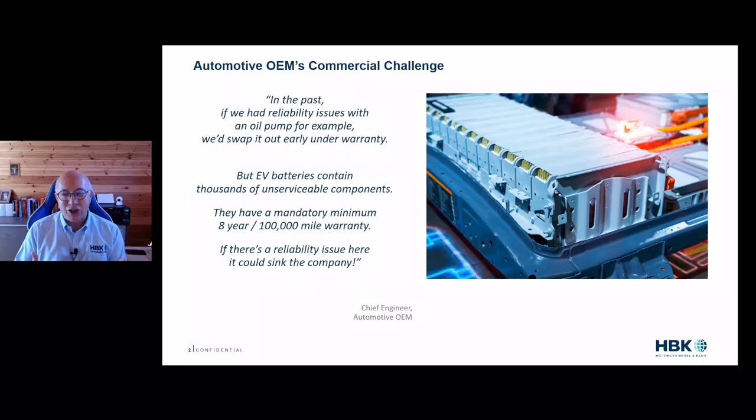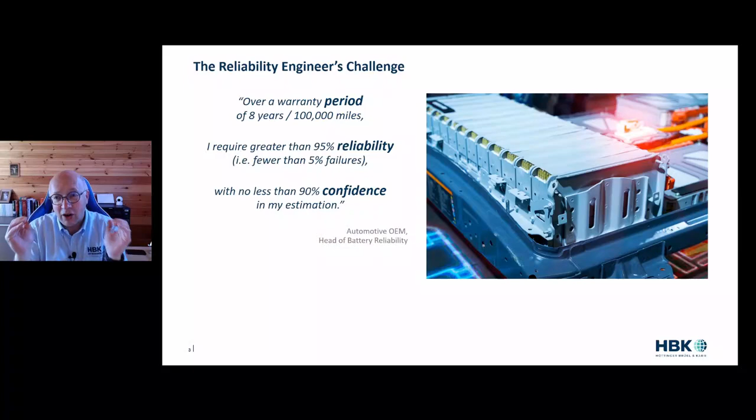Of course, that challenge then filters down to the reliability and durability engineer. The head of reliability put it this way: over a warranty period of 8 years or 100,000 miles, I require greater than 95% reliability. That means fewer than 5% failures, with no less than 90% confidence in my estimation. In other words, we have a period, we have an expected number of failures in that time, and we also have a confidence interval in order for him to sleep at nights.

We know from our experience of statistics that that will require tests in order not just to predict an average life, but to look at the distributions of life. And we know that fatigue is a highly variable subject. Looking at that as a design description, it makes me think about the good old days when all we had to do was pass a sign-off test. Today, the challenge is much greater. And that's what I want to talk about in this presentation.

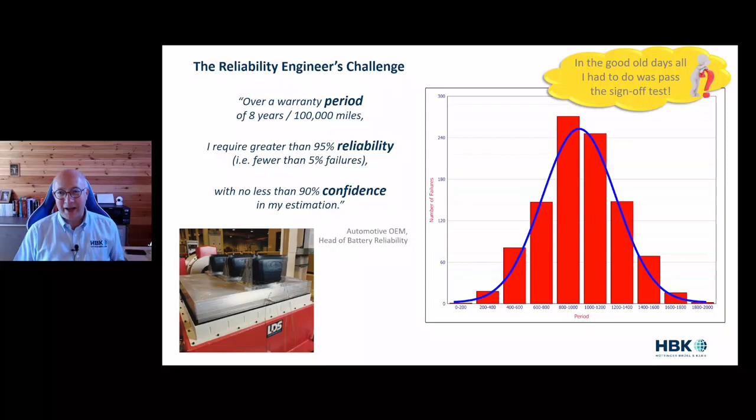So I want to split it into these 4 parts. First of all, I want to introduce simulation, verification and validation. In particular, I want to introduce moving on from deterministic design, which is the way we've designed things historically, to a new process called stochastic design. I also want to reflect on how this impacts fatigue, going from the old fatigue methods of build it, test it, fix it for new innovations, to simulation, verification and validation.

Once we've done that, we'll have a look at how simulation and test can work together. Then we'll have a look at how we quantify uncertainty, because in order for them to move together and for us to validate simulation through test, we have to understand uncertainty. So we'll talk about how do we do that? Where does the uncertainty come from? How do we model it mathematically? And we'll finish with a case study. Then at the end, we're going to end up with the conclusions.

The historic way of doing fatigue design is what we call a deterministic design. Deterministic design is a one-shot analysis. We first of all take all the loads, all the stresses, and we factor them up. That now assumes the very worst cases all act simultaneously. Then we take the strengths and we factor them down to assume that we've got the worst case materials with the worst case production effects and so on. And finally, we add a safety factor to account for uncertainties or modelling errors.

Of course, the variability in the inputs and the outputs, that's unknown. Our risk of failure is unknown, but hopefully if the factor of safety is so big, then we can sleep well at nights. I remember in my very first job, I was designing a bridge in a shopping centre, and the loads were huge. I remember going to my supervisor and saying, where did these loads come from? They're massive. And he says, well, you have to think about the worst case scenario. Let's suppose that a circus comes to town and a herd of elephants are crossing your footbridge. And then suddenly a mouse runs underneath and they all stop dead and they all look over the same side. That's your worst case scenario. And I couldn't help but think, how are the herd of elephants going to get on my footbridge in a shopping centre? But that's the way it goes.

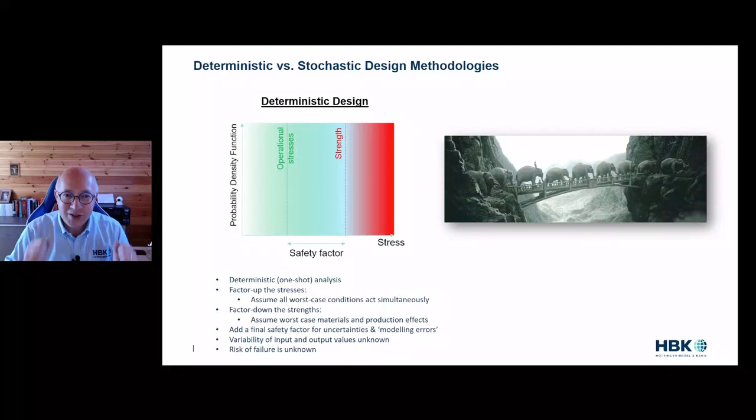Of course, now we want to introduce probabilistic or stochastic design. In stochastic design, stochastic means statistical. So here we're trying to now measure the variability and the uncertainty that we have in our loads, measure the variability and uncertainty in our strengths, and then we're going to simulate those models to find out what is our probability that our most severe user is going to get hold of our worst production model. So by doing this, we can verify the models with the tests, and we can validate the designs with clear and quantifiable risk of failure. That's what we're after.

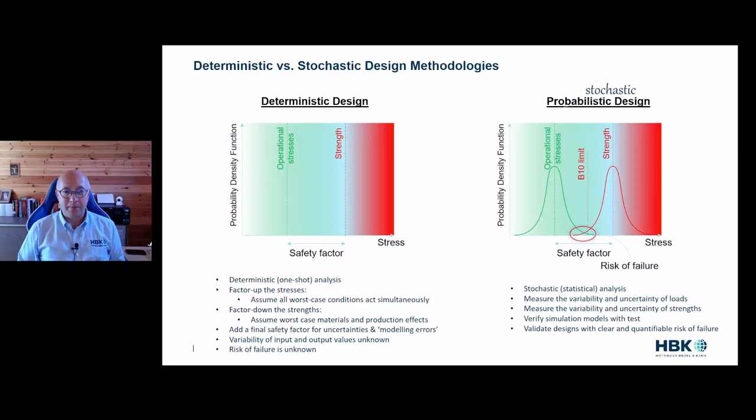So in the beginning, when we go back to fatigue, we used to do it before simulation came in. We'd just use test. We'd first generate a concept, build a prototype, test it, and if it was okay, we'd go into production.

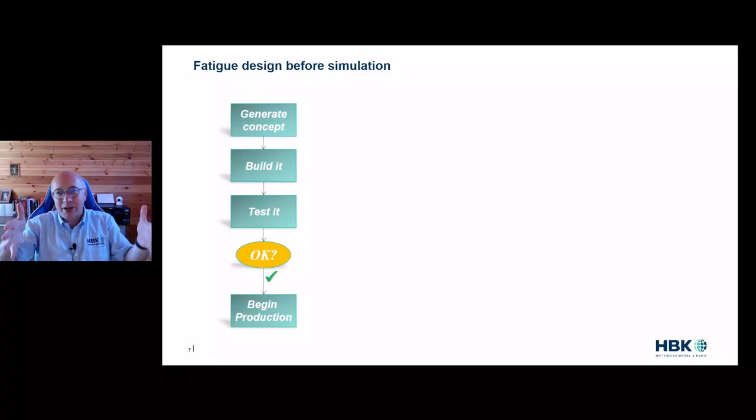Of course, if it wasn't okay, we'd have to fix it. This was a really expensive and time-consuming process of fixing the problem and then building a new prototype to retest. And very often we would run out of time and have to go into production anyway.

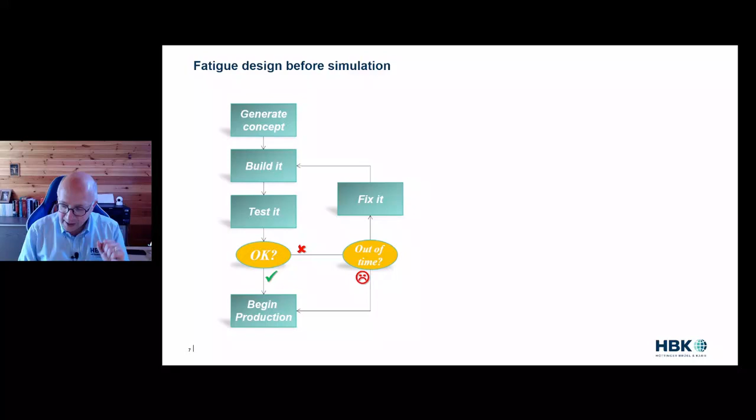Part of the reason is that by fixing one problem, we often create another problem which could be completely different. By addressing durability, for instance, we may hit a cost problem, or we may hit reliability or styling issues. The other problem is, can we test every conceivable failure mode?

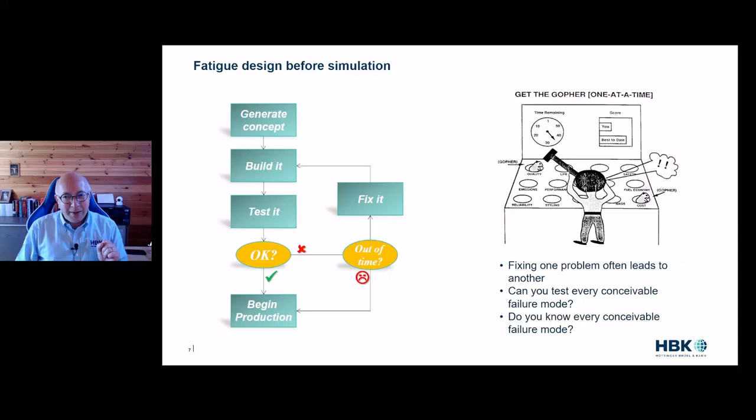That's a lot of tests. And if it's a novel component, do we even know what every conceivable failure mode is? So around two decades ago, or maybe slightly longer, we started to bring simulation into this, and we introduced the 5-box trick when it comes to fatigue.

In order to predict life, we do a fatigue analysis. That fatigue analysis takes 3 inputs: the loads, the geometry, and the materials. The loads are the loads coming in, in kilonewtons. The geometry changes those loads from kilonewtons into stresses in megapascals or strain. And then the material properties change those stresses and strains into fatigue life.

Of course, with our battery, those loads can come from several sources. There may be structural chassis loads, but they could also be inertial loads as the battery mass is being shaken around over rough road surfaces. And of course, there are thermal loads too, due to constrained thermal expansion as the battery heats up and cools down. Now the nice thing is, in simulation, we can model those in CAD and FEA.

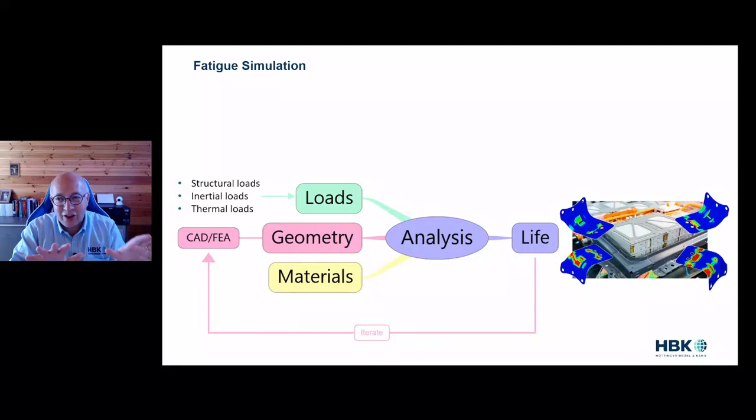We can run through them and iterate that in order to get the design we're after. Now, no one actually ever trusts a simulation, so you're still going to have to sign it off. So the sign-off test comes: we build a prototype, subject it to qualification tests, and then we can measure the life.

Now, to do that, we need to make sure that the test and the simulation share the same loads and the same boundary constraints. I know that sounds really obvious, but up until about a decade ago, it was very normal to do simulation of real loads and then an accelerated test, so it was never possible to correlate the two together.

Which is something that we now do a lot of, correlating them together. So we have to make sure we've got the same loads, the same boundary constraints, and also we need to test to failure, because that's the only way ultimately we're going to be able to correlate the life. I'm going to talk about how we can do that in this session.

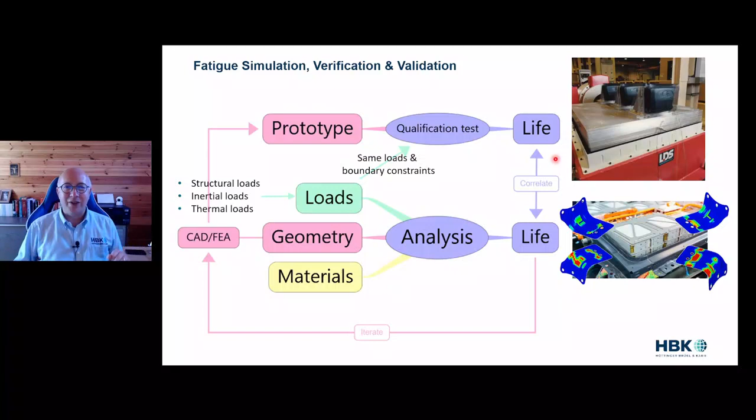So how has this impacted automotive design, and aerospace by implication of the same thing? A friend of mine who is a tech specialist in an automotive OEM put it this way: we have 3 groups of people who are interested in fatigue. We have design engineers who simulate their designs and make them not fail.

We have test engineers who try to make them fail. And then we have our customer, and if we're unlucky, they ultimately manage to succeed in that failure. So the vision is to characterize the customers, to then build a statistically representative test of that customer, and then to simulate the test.

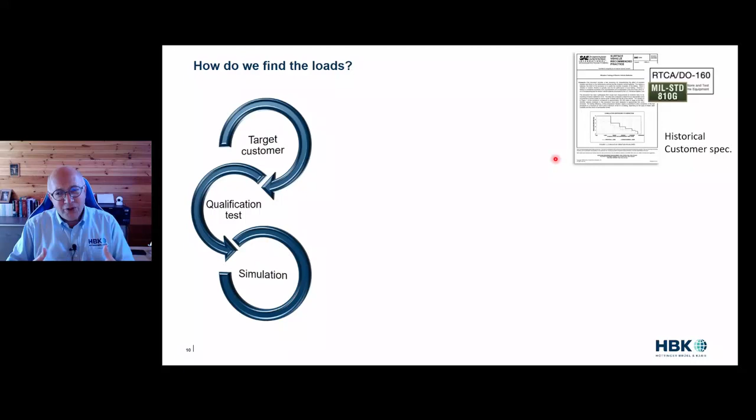So how does this manifest itself in an automotive OEM, for example? Well, historically, we've probably gone to standards or past practice. So if it's a military vehicle, it could be MIL-STD 810, for example, or a military aircraft. Of course, if it's something like a car, you may be using an SAE standard, or your own in-house standard. But with novel items, it becomes necessary to actually go out and measure how people are using them.

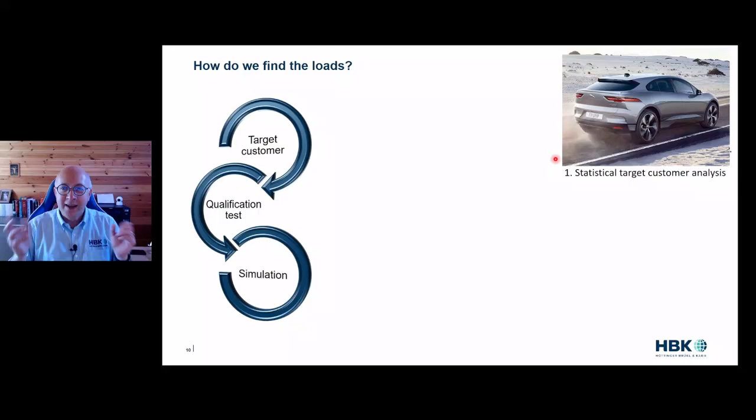And that's what we're doing a lot more of today with electric vehicles: how do people really drive these around the world, as we're designing a world vehicle now? Once we've done that, we can start to build a proving ground schedule. So we characterize the 95th percentile worst driver, for example, and then we'd be able to drive vehicles around a proving ground, and then we can measure loads.

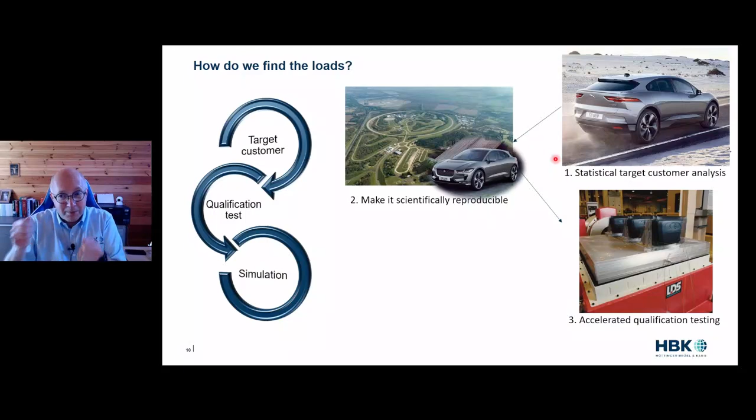We can measure a lot more loads on a proving ground than we ever can on our highway. So in this way, we take our characteristic driver and build a proving ground where we can measure the loads, and then start to build an accelerated qualification test for individual components. We can't sign off the whole vehicle on a proving ground because it has different accelerated damage rates for different types of component. So it's much better to do that in a laboratory.

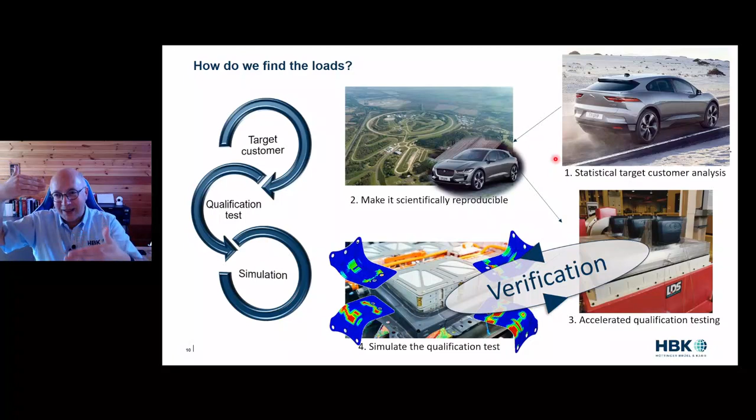And then finally, we come to simulate that qualification test using computer simulation. Now, if we do that right, we can use the test in order to verify the simulation. I'm going to talk about this in a minute. How do we do a test which can then feed into the simulation and vice versa? How do the two play together?

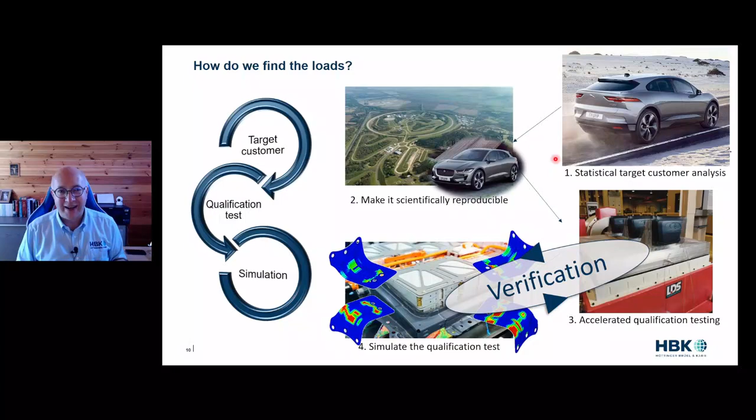Once we've verified that simulation, we can use it to extrapolate different loading conditions and things like that too. And ultimately, what we want to do is validate the reliability target using a properly verified simulation model.

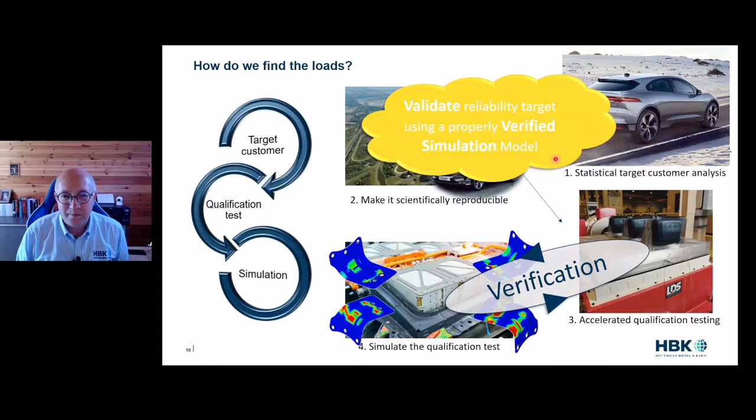So in that last section, we looked at the traditional deterministic design and looked at how stochastic design in the present and the future looks. And we reflected on how that looks in fatigue, from the old build it, test it, fix it days to bringing in simulation, verification and validation.

And now what I want to look at is how those simulation and tests sit together. How do they help each other? So first of all, we have to appreciate that simulation can be valuable before we do the test, during the test, and after the test. So let's have a look at each.

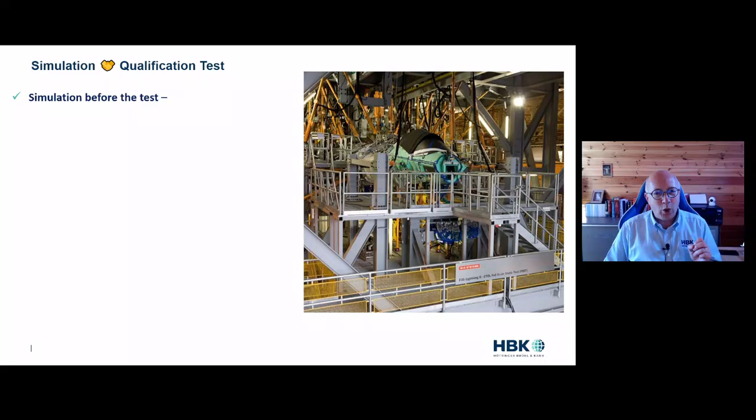So, simulation before the test. What sort of questions do we want to answer with this? Well, the first obvious one is, before I actually invest in an expensive test rig, is it likely to pass? So we're going to ask, what's the expected safety margin? Could I optimize the design further? And most importantly, am I sufficiently confident that I should commit to this expensive prototyping right now? Maybe if I had another month, it would be better and in the end work out cheaper.

Another question we can ask ourselves is, where will it fail? Where should I look for this failure? Is it going to be subtle and I'll need extra instrumentation to spot it, or is it really obvious? And also, do these failure modes correlate with my previous experience and what I expect? Because if they don't, we may encounter a new type of problem, or we may be missing something.

And then finally, is it okay to use a simplified test? If it's a shaker table, it might be a uniaxial test, for example. How does that actually affect the fatigue of my component? Do I get the same fatigue failures? How does it affect the life? Should I add supplemental axes to these? In other words, if it's a shaker table, shake it in Y and Z as well. So how does the test simplification also affect what I'm expecting?

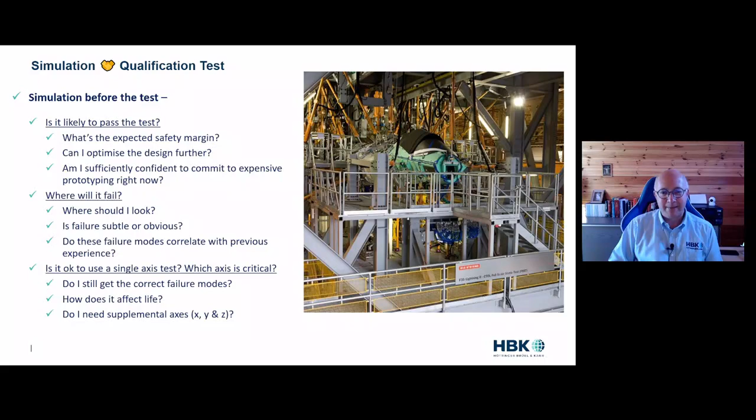Of course, the simulation also plays a part while we're testing as well. So typical things that we might want to look at here is, where's the best place to mount sensors? If I'm trying to find the mode shapes, I want to find the places of maximum displacement. So again, simulation can help us to find that. It can optimize the positioning of strain gauges, accelerometers, displacement transducers and thermocouples, so we get the best measurements from our test.

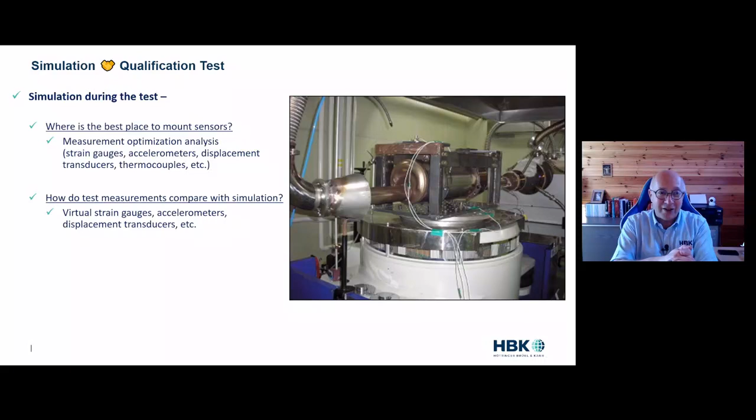Of course, when we collect those measurements, we can also use virtual gauges on our FE models in order to validate them - a virtual strain gauge, accelerometer or displacement transducer. Is our simulation giving us the same response as we're physically measuring?

And finally, we can do parametric analysis too. We can get parameters, such as modal parameters, for instance, which we know are critical in the response and the fatigue of a component. So we can use operational deflection shapes to make sure the natural frequencies and the mode shapes look the same. We can use experimental modal analysis or operational modal analysis to calculate the damping ratios. And we can use modal assurance criterion to make sure that our stiffness and our mass and our damping matrices are right and we're getting the right correlation.

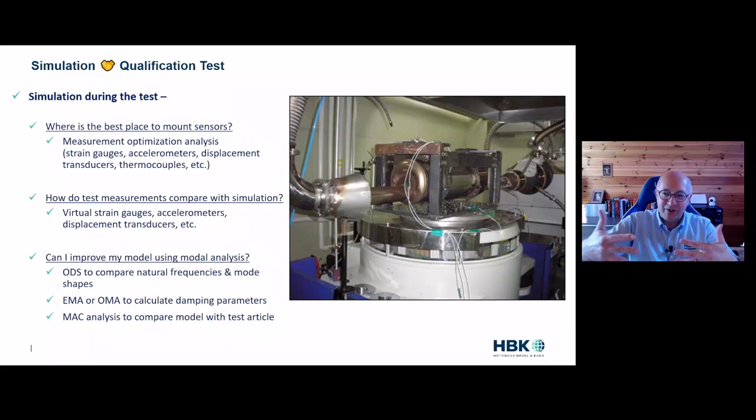So we're using the test not just as a simple sign-off test, but in a way that we can feed back and verify our simulation model. And then finally, after the test's finished, what happens if it failed? Well, in that unlucky occasion, we can actually simulate the failure mode.

We can take our simulation and say, what is it we got wrong? Can we simulate this failure mode to find that out? I can pretty much tell you it's going to come down to a difference in the fixing between the simulation and the test rig, boundary constraints, and damping ratios. They're the three critical ones.

But once we've fixed it, we can then play what-if games to fix that problem so that the next time we test an article, we're guaranteed it's going to pass.

Another thing you can say is, how confident am I? I might only do 1 or 2 tests. How confident am I in that? What's my warranty exposure? Should I test to failure or just stop at a given target? And how many tests do I do?

So you think about this as, say for example, a shaker table sign-off test. It's a bit like kicking a ball over a wall. You kick the ball, and at a certain given time, there's no failure. In other words, the ball's over the wall. And then you usually stop the test, don't you?

You've got no idea what happened afterwards. Did the ball carry on? Would it have failed 10 minutes after or 10 days after? We're not really sure about that.

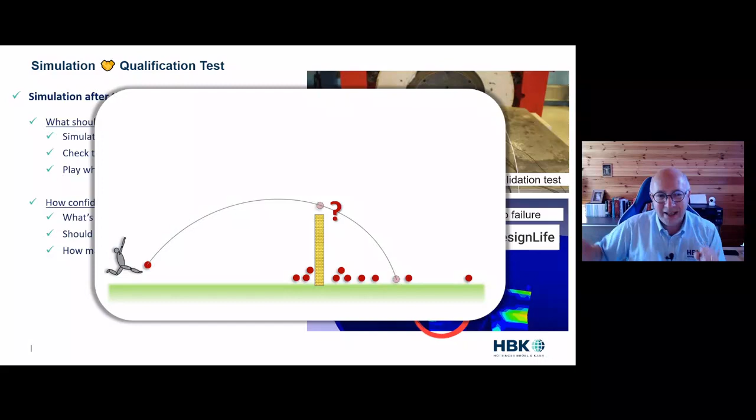And also, what happens if I kick a number of balls at the wall? How many clear the wall and how many don't? Because those that don't clear the wall, they're going to be our warranty costs.

So here we find that if we want to verify our simulation, it's important to carry the test over to failure. But we can actually be smart on this.

The nice thing about simulation is we can actually turn the volume up. So if your component's got to this stage and it's passed, we don't know whether it's going to fail in 10 minutes or 10 days. So let's just crank up the volume a bit.

And maybe it didn't fail within 24 hours, so crank up the volume again. But the important thing is to test it to failure. And with simulation, we can simulate the volume cranking up. It's important to get that failure because that's what we can use to verify our simulation on fatigue life.

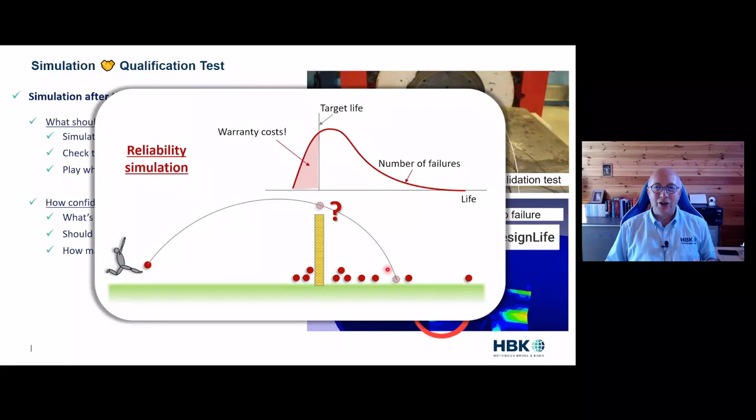So we can use simulation in conjunction with physical tests to help improve our confidence. We can also look to see, through simulation, how reliability changes with different platforms or different users. Let's say, for example, that 5 years into our product run, we've started to see early failures in some of the vehicles. The question here is, am I going to be alarmed by this, or is this something I would expect as the early people coming in with their 5% accepted failure rates?

Because we know that one battery module is probably put on different platforms in different countries with different drivers, all with their own different usages. Am I just seeing the worst case driver here?

The nice thing with simulation is we can go back to our initial target mission profile and start to say, in this country we've got this scenario. Do I expect that they're my worst drivers? And is this something I should expect, or is it something I should be worried about and looking to remedy?

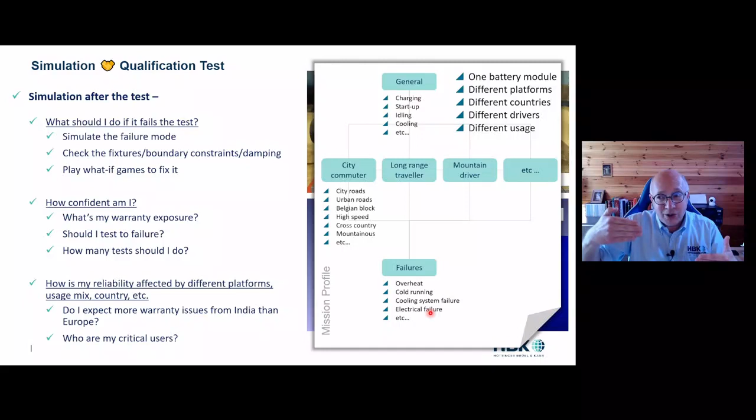So again, simulation is really good at doing this, spotting your critical users and also looking if certain users you would expect failures to come in early. So we can use simulation and tests together. It's not one being better than the other, it's that they're better combined. And simulation can go before the test, during the test, and after the test.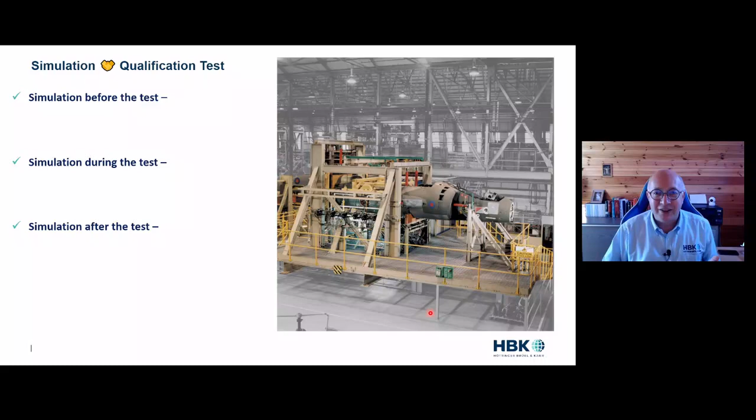So we've now looked at stochastic design and how simulation can fit in with testing. What I want to look at now is why it's important that we start to simulate uncertainty. We're going to look at the sources of uncertainty, how we model that mathematically, and we're going to finish with a case study as well.

So first of all, why is it important that we should model simulation uncertainty? Well, we know if we take 2 components off the same production line on the same day, and we give them to 2 identical customers, we would not expect one to fail at the same time as the other. We know that fatigue starts off at a microstructural level, and at a microstructural level, no 2 components are identical. Neither are the usage, really.

So we tend to expect a factor of 2 to 3 in real life, just under normal conditions. As designers, we also know that we could probably expect 3 to 5 for a normal component, and 5 to 10 is not unexpected.

So with that amount of variability, how can we suddenly compare test results from simulation with physical tests? How can we do it when there's such a whacking big gap? That's what we're going to look at here.

But before we do, it's important that we understand the two different types of uncertainty. They are epistemic, or reducible, uncertainties, and aleatoric, or irreducible, uncertainties. Epistemic uncertainties can be reduced by better knowledge, better measurements, better modelling, better understanding of your customers, for instance. We can reduce the amount of uncertainty. But aleatoric uncertainties are irreducible - they can't be reduced by better knowledge.

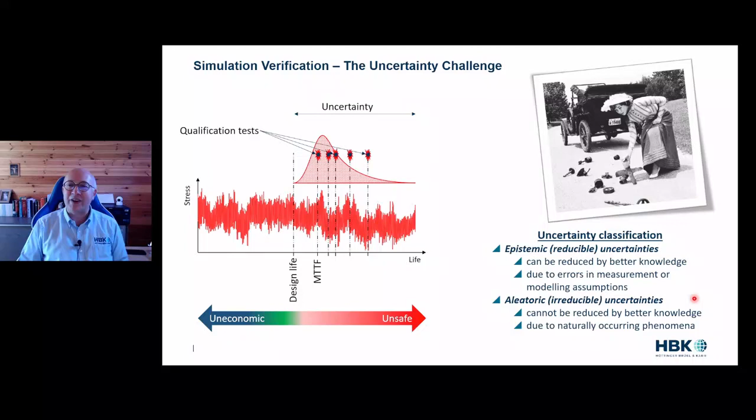So where do the uncertainties come from in fatigue? For this, we're best going back to the 5-box trick, remember, and there's those 3 inputs, and in those 3 inputs, we end up with uncertainties. So let's look at the material first.

Our material uncertainties are governed by our fatigue curve - SN, EN, fracture mechanics, and so on. And we know that we end up with scatter about that curve, and these are aleatoric uncertainties. They're a function of that particular material, with its different flaws and everything else in it. We also know, though, that there are epistemic uncertainties due to measurement.

But as fatigue engineers, we pay particular attention to make sure we have the best quality measurement devices that are most accurate - extensometers, load cells and controllers - to make sure our epistemic uncertainties are very small in comparison to the aleatoric. We want to capture those aleatoric. We don't want to confuse that by throwing in additional errors due to our measurement epistemic uncertainties.

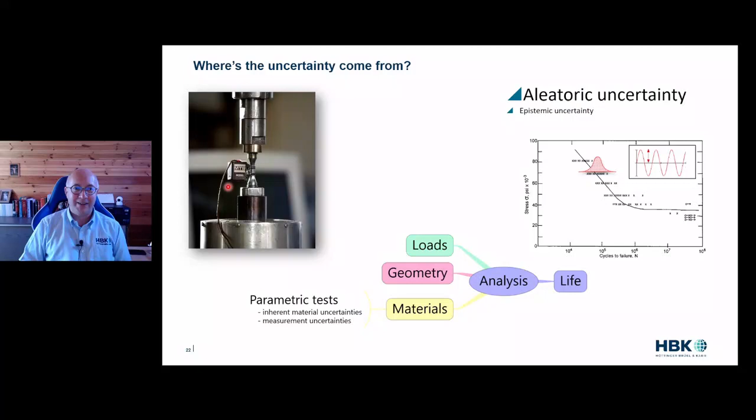How about loads, though? Now, these can be a mixture really of epistemic and aleatoric uncertainties, and it sort of depends where they come from. So let's say, for example, we're designing a wind turbine or an aircraft, and the loads come from design codes. Now, you may say in this case, what's the point in doing a stochastic design when actually we've been given factored loads? However, the factors themselves are usually known.

So we've got an idea what the safety margins are, and that will help us in understanding reliability. But also, many codes - we've also got a lot of options that we can choose too. There may be different load case permutations that we consider, or a different mix, for example. How does that impact our design? It's still really useful information in a stochastic design.

Of course, we may be measuring our loads, but in this case, where do the loads come from? Do they come from real customers on real roads? Do they come from simulated usage on proving grounds, for instance? Or are they from laboratory tests, like dynamometer tests?

So here, again, we've got a mixture of epistemic uncertainties. Have we really captured enough people to find out our target customer? Have we got the right value for that? And also, there are measurement uncertainties that we're getting as well. So a mixture of epistemic and aleatoric uncertainties.

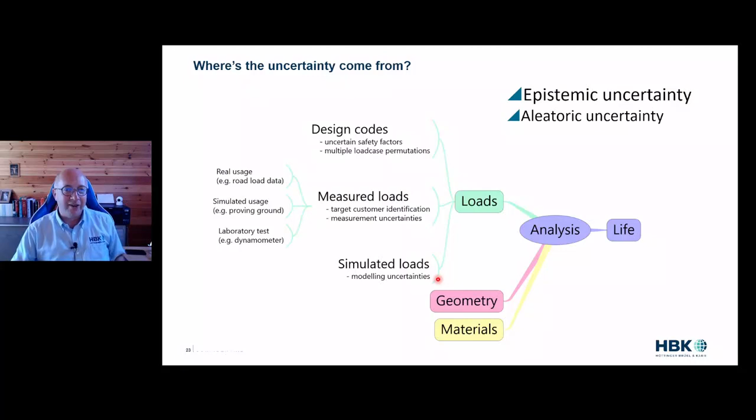And finally, more and more today, we're actually simulating loads. So we've got our model of our car going over a proving ground, for example, and then we're going to run that through a kinematic simulation, multi-body simulation, to chase those loads to the point where they're going into our particular component. So the simulation is also adding an additional layer of uncertainty on there.

And then finally, we've got the geometry. So where did we find this from? Have we actually measured it using real production line components? Or again, is it simulated? So if it's been simulated through FE, for example, does our CAD geometry actually match with what is being produced at the end of the production run?

What about our uncertainty due to finite element meshing constraints and problems with that? What about the constraints on the model itself and the loading? And how about parameters, in particular things like - have we got the damping there, or have we just guessed it? So there's the parameters that are also affecting our simulation. Again, lots of uncertainty there - a lot of that is epistemic. If we knew more, we'd be able to reduce that uncertainty and be more accurate.

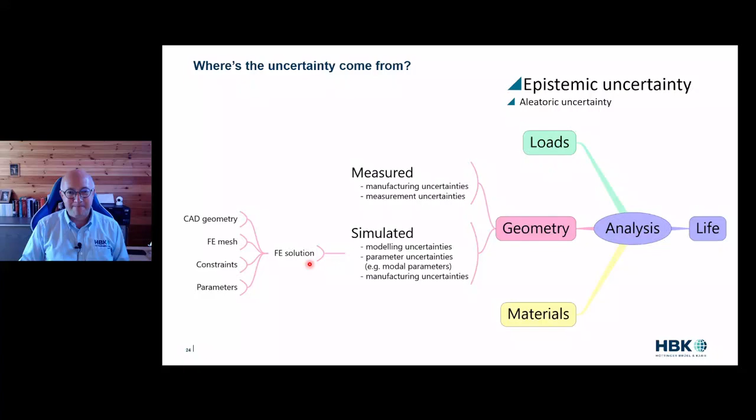So now we've looked at the sources of uncertainty, let's look at how we can model that uncertainty. This is called uncertainty propagation. We start off on the left with the uncertainties, whether they be measurement, manufacturing, or parameter uncertainties. We then have to propagate those uncertainties through our analysis until we can quantify them at the end.

That's the result. Now when we look at uncertainty propagation, if you look online you'll find there's a lot of research going on. I split them into two methods really: there's analytical methods and there's numerical simulation methods.

The analytical methods are, for every mathematical operation, there is a corresponding uncertainty operation as well. So analytical is all about taking those equations and working out what the corresponding uncertainty calculation is. It's very easy to do things like linear static and linear dynamic. There's a lot of research work going on into nonlinear dynamic type analysis in this.

Now analytical methods work really well if you're trying to do a measurement transducer and look at the uncertainties through that transducer. But for us, we're looking at numerical simulation through finite element, for example. So for us, we're better off going down this route.

And here we'll start to come across terms like Monte Carlo simulation, design of experiments, response surface analysis, and reduced order modelling or surrogate models. So I'm going to talk about those in a minute.

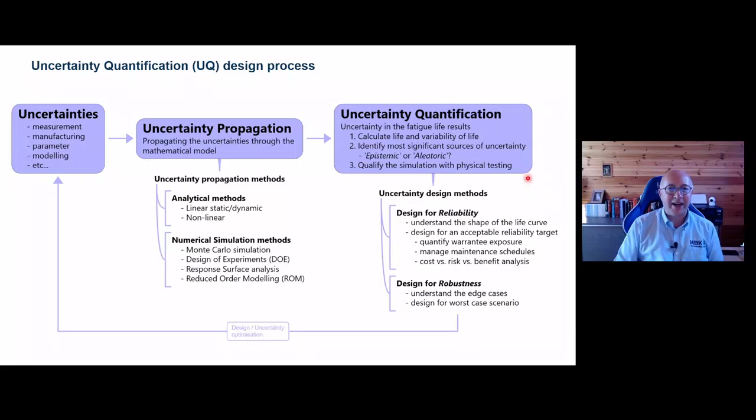So how do we take a traditional fatigue analysis in our 5-box trick and turn it into a stochastic analysis? First of all, our 5-box trick is what we call a deterministic process. That means if you've got the same set of inputs, you will always get the same output - it's deterministic, the output is determined. With a stochastic one, the inputs can change statistically, and therefore our outputs change as well.

So the way we do this is we change our inputs. Instead of them being constant values, we give a mean with a probability distribution. And then finally, we wrap our deterministic process inside a Monte Carlo wrapper. This wrapper runs that process over and over again, and every time it runs it, it uses a different set of inputs from their probability distribution. The result of that is now for each failure mode, we get a range of answers coming out, and then we can start to do statistical analysis to understand that uncertainty and that variability.

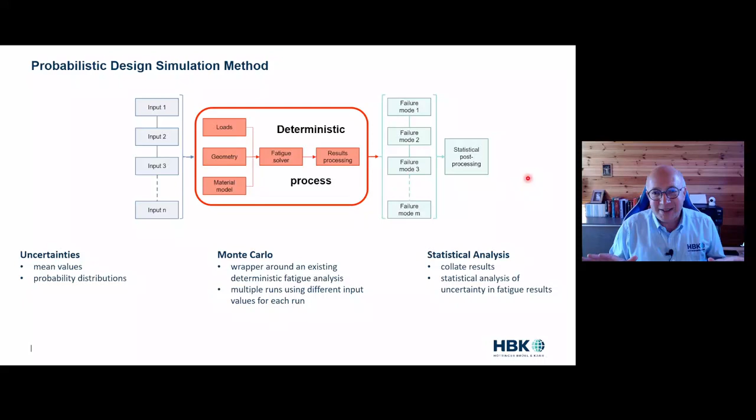So the first question is, what is a Monte Carlo simulation? I thought I'd just put a slide together just to illustrate what we're doing here.

So let's say I've got an input parameter and it changes with a Gaussian normal distribution. Now, all I have to do to make this work is, first of all, I need to get a range of inputs, and I just use a standard random number generator. It generates a random number between 0 and 1 a number of times.

In order to then shape that to fit my normal distribution, what I can do is project these onto the cumulative distribution. Remember, the cumulative distribution goes from 0 to 1. So now when I've got my random numbers, I can project them along and then look down, and this gives me 5 parameters in this case. I'm only showing it with 5 for simplicity, but these now have a normal distribution. In reality, I'd probably use a lot more than 5, but you get the idea. And by changing my standard deviation and mean, I can change the way this looks.

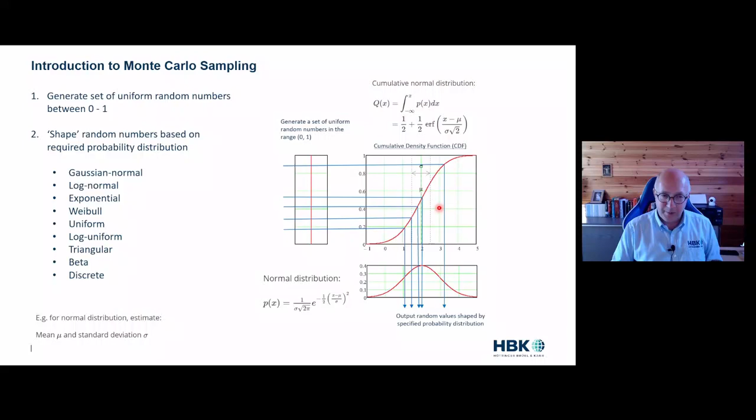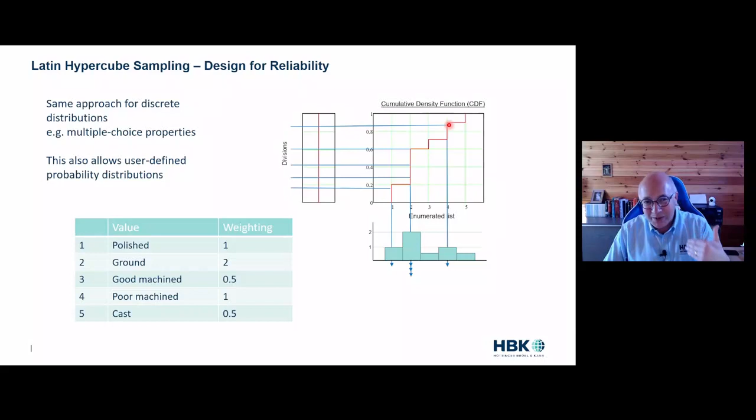So whatever distribution I'm using, whether it be a normal distribution, log normal, triangular, whatever it is, I can use the same approach to get my input variables for my Monte Carlo simulation. And it doesn't have to be a continuous distribution either. It can be a discrete distribution like this. I've got 5 conditions here, only for illustration. Actually, if I've got 5 discrete conditions, I'd need to be showing much more than 5 random numbers, but you get the idea. We can generate those random numbers, project them along to the cumulative distribution, and that gives us this probability curve.

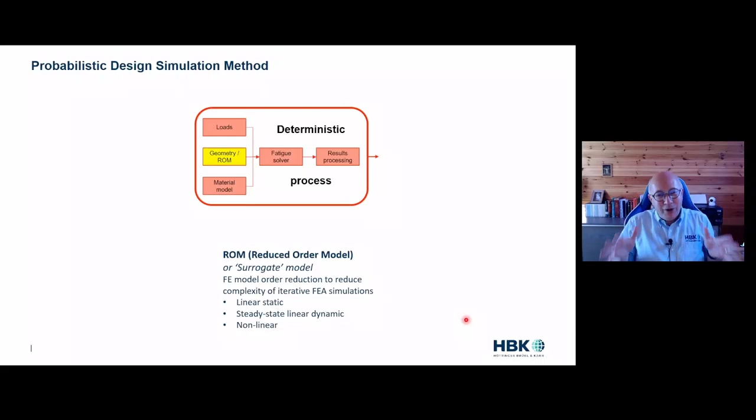So we've looked at how we can take a deterministic process, put it in a Monte Carlo wrapper, and then run it through a Monte Carlo simulation. You're probably thinking that rerunning an FE model over and over again 1,000 times is going to be expensive, and it is. That's where we can make savings by using what's called a reduced order model or a surrogate model.

The nice thing is, in fatigue, we've been using surrogate models ever since we started doing finite element-based fatigue. So we take our fatigue results from the FE, we find the critical areas, and then we can calculate participation factors - a scaling function between load and response. So we can do linear superposition and things. We could also take that not just linear static, but steady state dynamic as well.

And it works through most of our cases. The only time that fails is when we get highly nonlinear cases that we can't easily linearize. In that case, we may have to run the full finite element over and over again, but that doesn't occur very often. So we can use our surrogate model to make this calculation really, really quick.

Now, there's another thing we can do too. We don't want to be running thousands of simulations if we can get away with fewer. So there's a process called design of experiments. Design of experiments is there to try and optimize our calculation space, the space we're looking at. And this is where I've split it into 2. If we're doing design for reliability, trying to understand the heart of the shape of the distribution, then Latin hypercube methods work best. I'll talk about those in a minute.

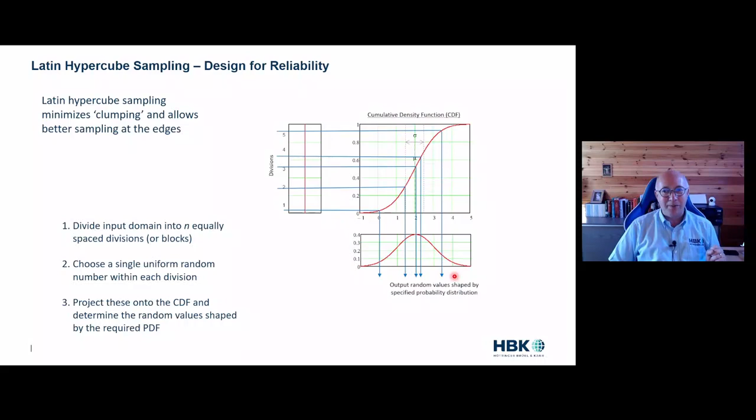Now you're also thinking, okay, that works for one degree of freedom for one single input, but realistically I've got multiple inputs. So this is where the Latin square comes in. A Latin square is where we've now got two random variables, x and y.

The idea of a Latin square is we split it. In this case, I've chosen 5 equal intervals over the distribution. All a Latin square says is I want to have a single point in each row and each column. So if I've broken x into 5 and y into 5, I've got 5 points, and each column and each row is used just once. That's what we call a Latin square, because it's square and there's 2 inputs in that.

Now there are additional refinements we can make too. Let's say this point and this point ended up being very close together. That's not good, is it? We've now got 2 simulations, but actually they're going to give very similar results. So there's an optimization we can do called maximize distances, where we try to maximize the distances between neighboring points to make sure we're not effectively running the same test twice.

Another thing we can do is, if you imagine there may be a way to fit a preferential line through here, that's not good either, because that's creating a correlation which may not really exist in real life. So again, we can minimize the correlation of points to make sure they're scattered further apart.

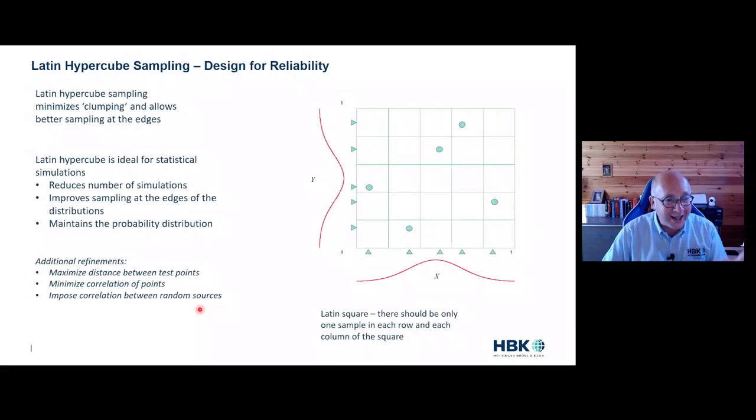Another refinement is, let's say x and y aren't completely independent, but have a partial relationship with each other. In that case, we can also impose correlation between those random sources as well. So that's another refinement we want to make.

Now that's okay, we've gone from 1 single variable to 2 variables. But how do we go to 3 variables and more? A Latin square is 2 variables, and to see how that works, we can look at it as a table. I've got random variable x and random y, and I'll choose just 5 points in my Latin sampling - 5 random points in each of these bins for x and for y. All I do to make that a Latin square is randomly associate a point in x with a point in y, such that I only ever use the same points once. That way we get our 5 different samples in our Latin square.

Now let's add an extra dimension. This is now 3-dimensional space. I do exactly the same - for each of my random variables, I generate my points, but I only use one combination of points once. That's how I can very quickly and easily generate these experiments. That's Latin hypercube sampling. It gets the word hypercube because a Latin square is 2 dimensions, a Latin cube would be 3, and anything beyond that is our hypercube.

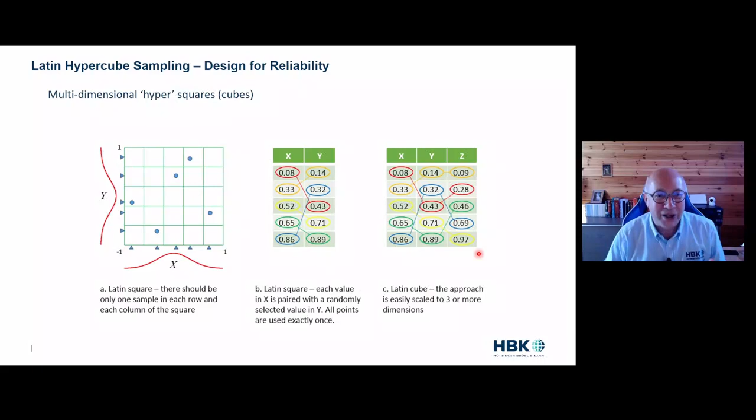Of course, that's good at understanding the heart of the distribution, but what about the extremities? For this we could use a factorial method, for example. In this case, I've got 2 random values, x and y, and I may want to look at cases where one's at a minimum and the other's a maximum, or vice versa, or both at maximum, or both at minimum. So looking just at the edge cases, I've got 2 to the n possible calculations. If I move this up to 3 variables, x, y, and z, that gives 2 to the power 3, which is 8 permutations.

Of course, you soon find out that you might want to add, well what happens if they're in the middle? That could be worse. So you start adding additional combinations, and the more you add, this scales massively. That's where you may come up with partial factorial - full factorial covers all of the combinations, partial factorial is a method where we can reduce them.

Or we could go to an iterative process called response surface methods. This is iterative - we start off by picking a few combinations, run them, and then project a surface through those. We use that projection to say, actually we need to run another one up here because I think that's where the new maxima is. We run that, come back, fit another surface, and iterate in order to find out where the maxima are in this case.

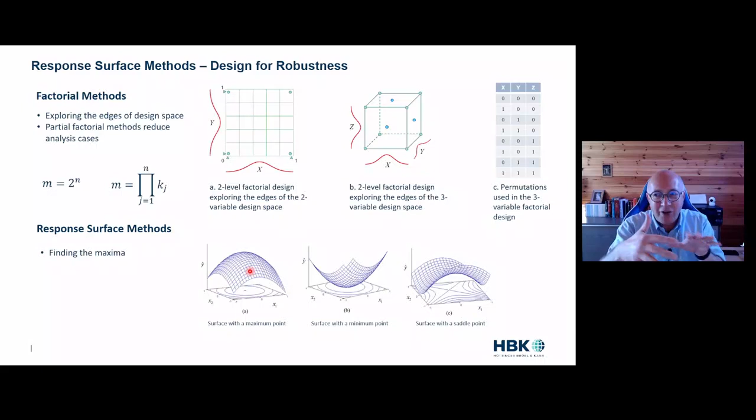So in this case, what we've now done is we've looked at design for reliability, understanding the heart of the distribution, the 95th percentile users and things like that, using Latin hypercube. We want to look at the edge cases, the worst case combinations.

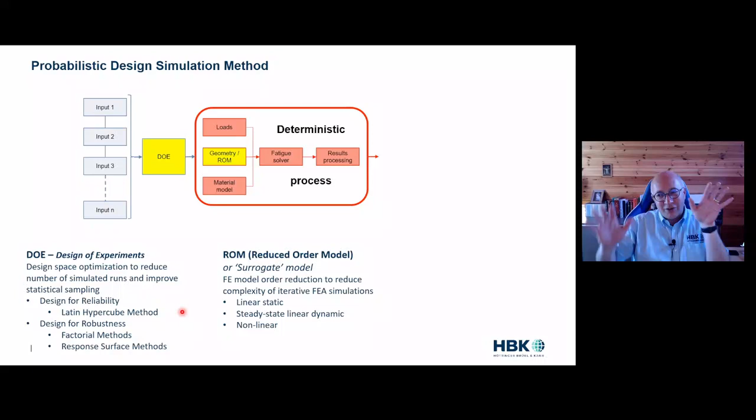We're going to use either a factorial approach or a response surface method. So that design of experiment has taken us from a few thousand samples into a few hundred, easing our workload by probably an order of magnitude, but we can ease it even more. To take it from a few hundred to a few tens, we can use some a priori knowledge.

We know that we're looking for a fatigue type failure, and we know that fits a log normal or probably a Weibull distribution. With that a priori assumption, we're not trying to fit a completely random profile, we're fitting a discrete shape, and we only generally need 2 parameters to do that. So we take all of those different failure modes, and now we're trying to find parameter estimates for a log normal or Weibull method.

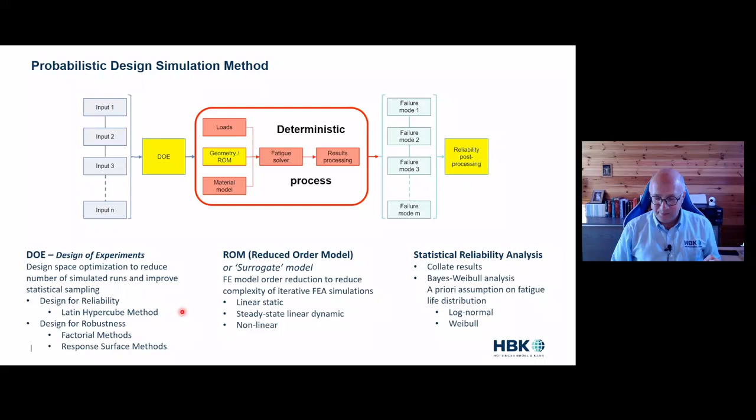Now, there are 2 ways that we can do that parameter estimation: rank regression methods or maximum likelihood, MLE methods. The reason we need these is because each one has its own benefit depending on where you are.

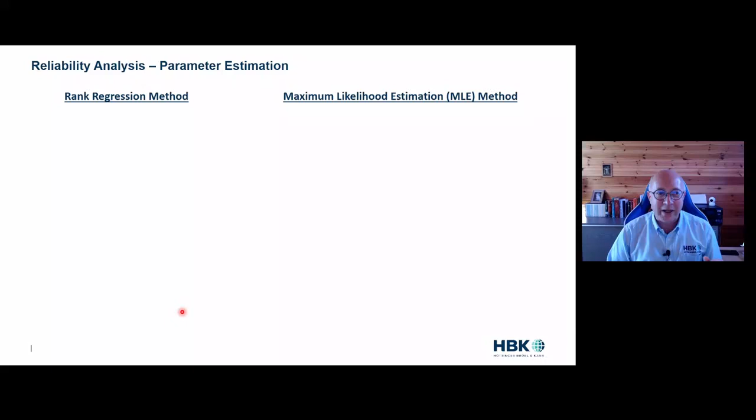Rank regression methods, this is really like fitting a line on probability paper. It's like going through the old Weibull paper that we all know and love. In this case, Weibull is shown as the failures of a few discrete points, and we're plotting the statistical ranking versus the life, whether that be in time or cycles or whatever. We can then draw a straight line through that, and we can also calculate the confidence bounds of that.

We can add a small addition to this. Maybe we've got things like runouts, so the test reached the end and we stopped it, but we didn't see a failure. It could have actually failed any time after. We can build that into this rank regression method too, but really you're better testing to failure all the time. In that way, we get some points nicely anchored here.

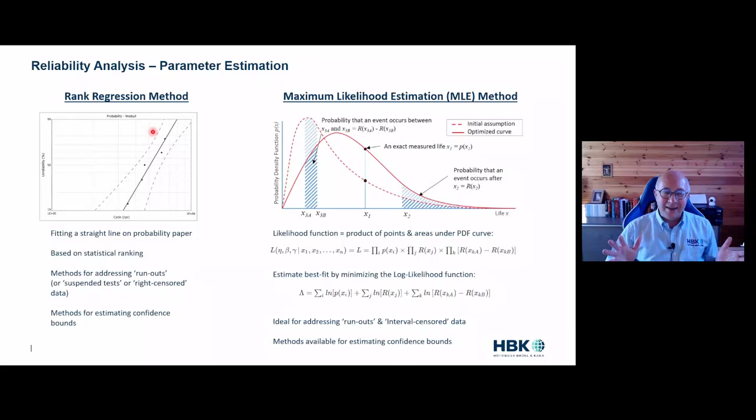So rank regression methods work very well when you've not got many tests. Physical tests tend to work well with rank regression methods because there's just not usually a lot of them. Maximum likelihood offers a lot more flexibility, but generally works when we have a lot more tests or simulated results, for example.

Now, this adds a number of benefits. Not only can we look at a discrete test tested to failure when we measured the actual failure time here, but we can also look at these run-out tests too.

So in this test here, we knew that when we looked at it at time x2, it was fine, and we just stopped the test. If we hadn't stopped the test, it would have carried on and failed at some point, but we're not sure when. So we've got this area under here that we need to find.

And maybe we've got what we call an interval censored one. So here, on Tuesday night at time x3a, it was fine, but by the time we got in on Wednesday morning at time x3b, it had failed. So sometime between Tuesday night and Wednesday morning, there was a failure, but we're not sure when. Again, this gives us this band under here.

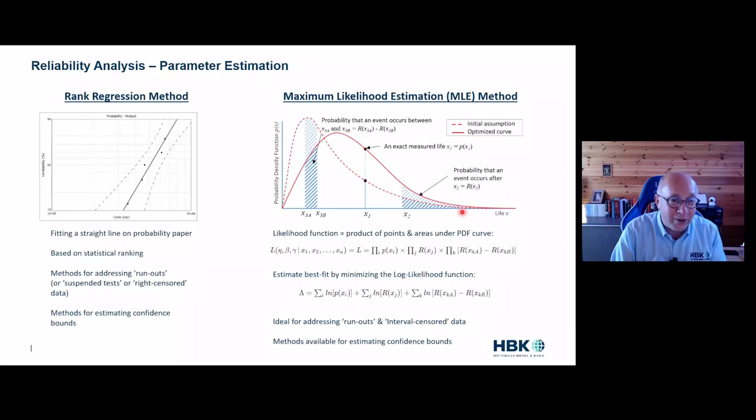And what we do with maximum likelihood is we try and maximize the area under that. We use this by what we call a log likelihood function, so we try and minimize that log likelihood function, and that allows us to find our parameters in here. If it was a Weibull, it would be beta and eta. If it was, say, a log normal, we'd be looking at log mean and log standard deviation as those parameters. By doing this, we can estimate those, and there are also methods of estimating the confidence bounds for those too.

A few tips if you're doing finite element: if your simulation in one of your runs says beyond cutoff, because it just happened that in that combination you were below the endurance limit, for example, then we can take those into account. We can call those a suspended test, and when we do that, we set the life limit to our cutoff limit, our endurance limit, and that works really well in our stochastic simulation.

Of course, you may also find that a couple of results come back as static failure. You may have exceeded UTS, for example. Now, in this case, it's much better to go and do a robustness analysis to find out why that possibly occurred. Is that an outlier case? Or if it isn't, maybe I've got a design problem and it's just not fit for purpose.

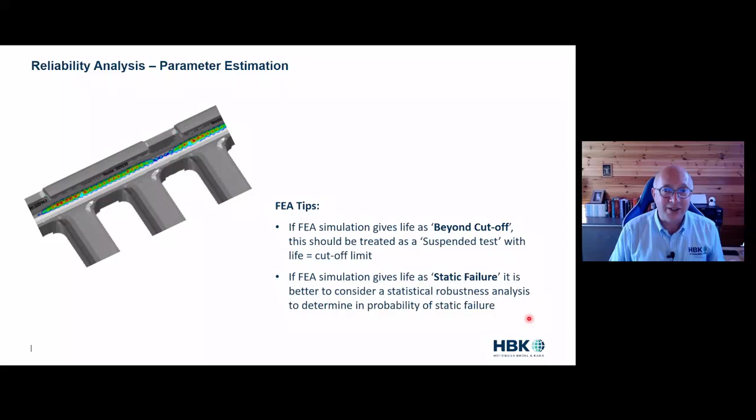So static failures, we can start to investigate by a robustness analysis and say, is this really a viable concern that we get this extreme combination? Or is it something I do expect in common, in which case it might indicate that I've got a design problem. Of course, when we analyse this, that just gives us one or two failure modes, or the fatigue of one component.

But we know that component is added with other components to make the combined system. How do we ensure the reliability of the entire battery pack, for instance? This is where we can use system of system simulation. So using those probability of failures, those reliability curves we've just got, we can build those into a system of system simulation. So, for example, we can simulate serial systems, where a failure of any particular one failure mode will cause the death of the entire battery pack.

A parallel system means we've got redundancy, so in order for the pack to fail, we need death of 1, 2 and 3. Of course we can combine them, we can have reduced performance if one fails, and all sorts of things like this. But the nice thing is we can analyse that in post-process really quickly, and start to do lots of analysis on our complex system.

We can start to do quantifiable risk exposure. What is the risk of my battery failing prematurely and incurring a high reliability problem? How, by making changes, does my reliability grow? Can I improve the reliability? How do I design my maintenance to ensure I've got preventative maintenance coming in at the best possible time, to both reduce my risk but also reduce my cost as well? So there's all sorts of analysis we can do once we've got this stochastic result.

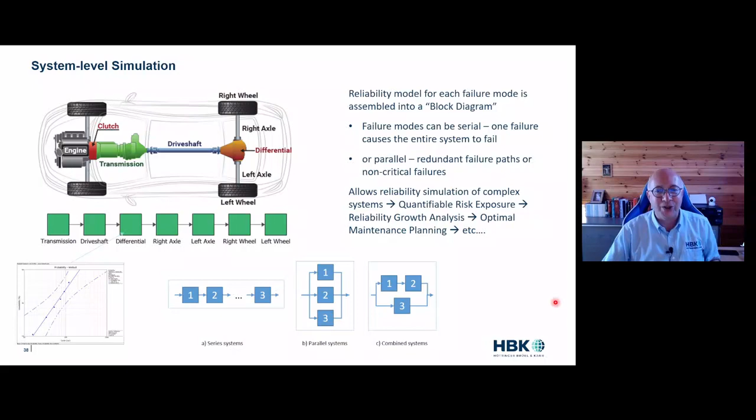So we've looked at the sources of uncertainty, how we model them mathematically. Let's finish off with a case study.

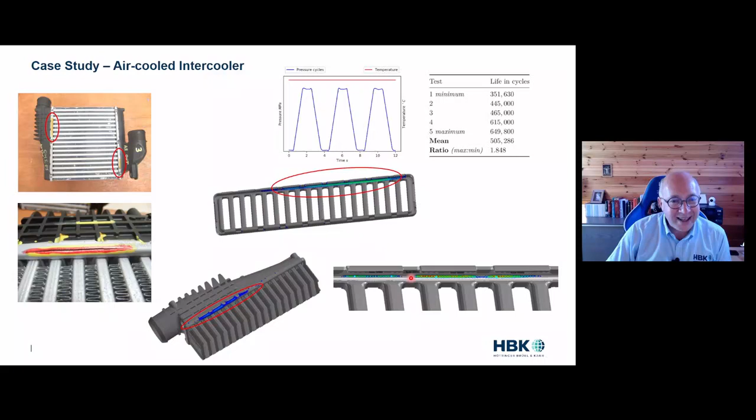In this particular case, we're looking at the fatigue of an air-cooled intercooler, and we can see highlighted here where the failures are occurring. In this test, it's performed at a high temperature, so the intercooler is kept at a high temperature, and then we provide pressure cycles. We can see they've done 5 physical tests here. The lowest life was 350,000 cycles to failure, the highest was 650,000. So the average life is about 500,000 cycles, and there's about a ratio of 2 between the highest and the lowest. We've also done finite element analysis to find the hotspot and calculate the life based on that.

But in this particular case, we just want to look at 2 different types of uncertainty. We're first of all interested in our material scatter, which, as we've learned before, is an aleatoric uncertainty. It's irreducible, it's a function of the material we've chosen to use - we'd have to change the material if we want to change that. We're also looking at FEA modelling errors - these are epistemic. So in our case, we want to see, is there a benefit in improving our model?

So we've got a crimped component here. We've not taken into account any residual stresses, the contact elements, or the fact that we've got a composite tank which has a different expansion and everything. None of that we've taken into account. Does it pay us to do it? Do we need to invest in better FEA modelling? Or, in this case, would the material scatter account for most of it?

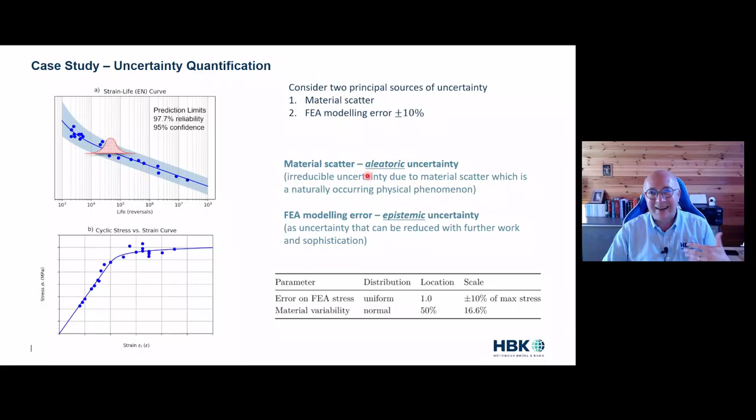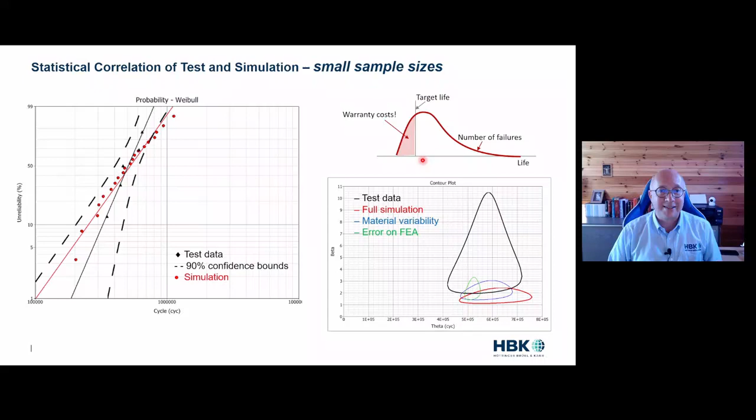So what has this shown us? It's shown us first that simulation gives excellent correlation with experimental results in this case. The model offers a reliable platform so we can perform additional design simulations if we want to, and can extrapolate and create reliability statistics. It's also shown us there would be no economic advantage in improving the FEA simulation—the precision in this case is limited by the material behaviour, not our finite element simulation.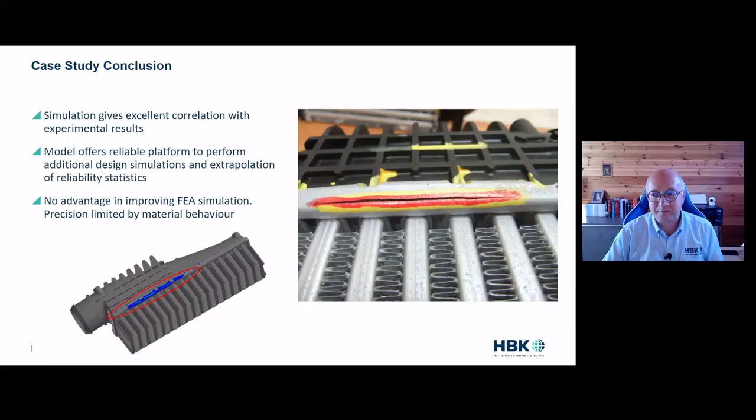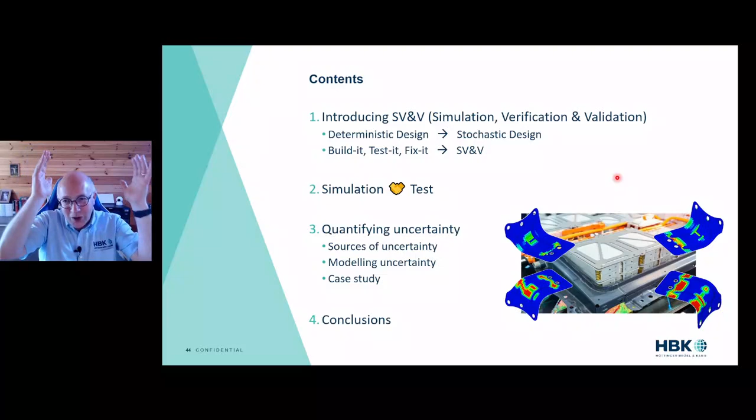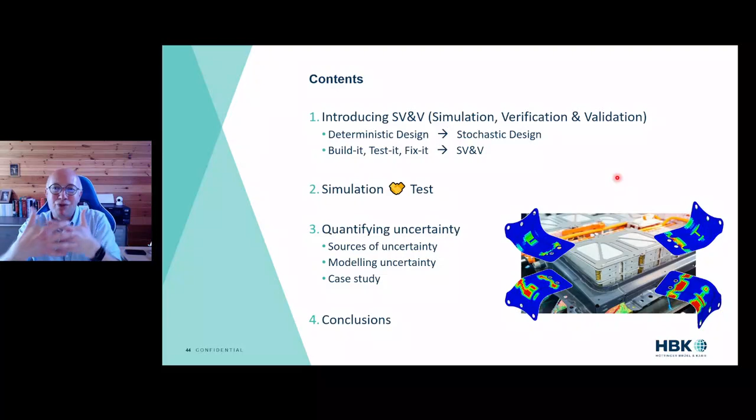So we've reached the end now. Let's have a look at where we are. At the beginning, we started to look at what is stochastic design, and it's all about trying to understand and model uncertainty. We looked at how, in fatigue terms, we can take the build it, test it, fix it approach, which was test-based, and bring in simulation. And we saw how simulation and test don't compete with each other—they work hand in hand to support one another.

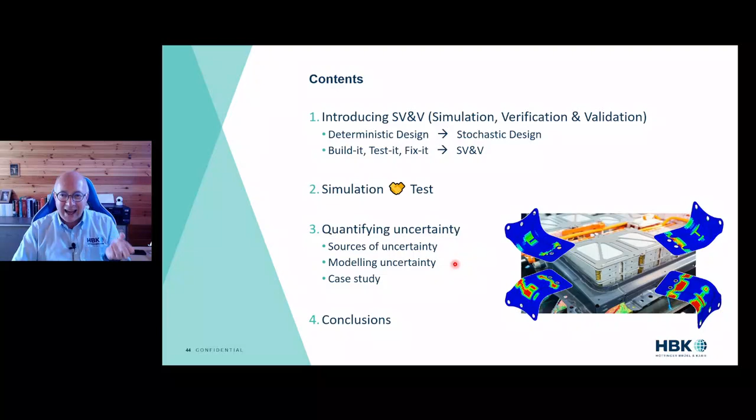We then looked at how we can actually quantify uncertainty. How do we model it? Where does the uncertainty come from? How do we mathematically model it? And we looked at a case study.

Now, in conclusion, we can actually see that there are significant benefits in going for a stochastic or probabilistic fatigue design over deterministic, because it's all about simulating uncertainty, and there's tons of it when we deal with fatigue. Yes, we get the average life, but we also know the variability in life for each of the failure modes. It means we can start to identify the most critical inputs.

So of all of the variability, which ones are affecting my design most? We can use that to optimize our design for uncertainty. That means we can avoid large safety factors, and we can minimize our risk exposure. And we can also find out whether these are aleatoric or epistemic uncertainties.

We've looked at design for reliability and design for robustness. So design for reliability, remember the Latin hypercube and things, is all about finding the heart, the shape of the distribution, and the 95th percentile.

So in this case, we can design for an acceptable reliability target. We can quantify our warranty exposure risk. We can manage maintenance schedules. We can do the cost versus risk versus benefit analysis. And this enables us to ensure we've got a good brand image and reputation.

Of course, design for robustness is all about understanding the edge cases, the worst case scenarios, to make sure that the worst driver doesn't get hold of our worst production model and things like that.